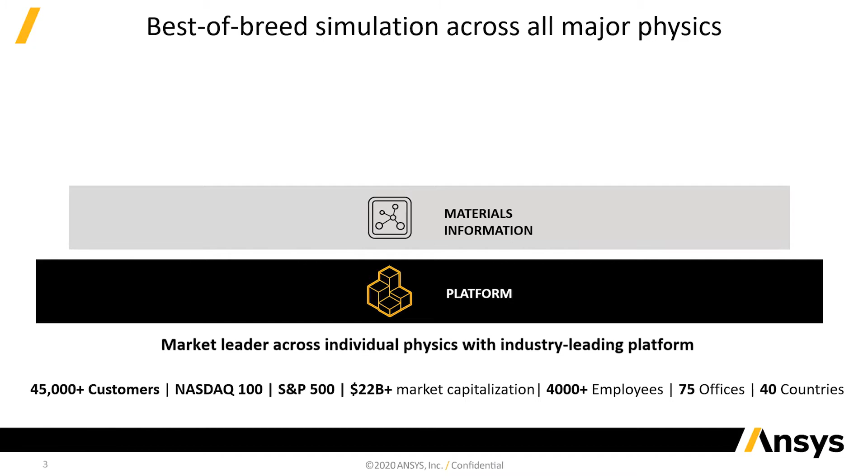We have what we call a platform solution, which is called Workbench. The new platform that we're developing is called Discovery. And on that, we have built a materials information platform, which allows us to conduct simulations in various physics, right? From fluids, doing CFD, structures where the additive manufacturing solution sits, electromagnetics, semiconductors, optical simulations as well.

For this year and in the next few years, the Ansys focus has been and will be on a couple of major pillars, if you will. One of them is autonomous. Second one is electrification. Third one is digital transformation. And that's where the additive manufacturing solutions play an important role.

We have world-class companies leveraging our platform. It's an interesting statistic: over 97 of the top 100 companies in the world use Ansys, all the way from aerospace to industrial companies, phones, and electronics manufacturers, especially in the 5G arena, who are using Ansys solutions a lot to understand the effects of 5G waves and wavelengths and how they can create products which can work really well with them.

Automotive, obviously, oil and gas, which of course is a debatable scenario right now, seeing where things are going. A lot of the home goods, consumer industries, and also a big chunk of the healthcare companies use Ansys platforms. So let's jump into the additive solutions. That's what we are here to discuss.

At Ansys, what we have created is a comprehensive and scalable solution to minimize the risk of your additive manufacturing process, right? With every additive manufacturing process, the reason we haven't seen the adoption that we wanted to see is that there's still a lot of risk. There's less repeatability in the process.

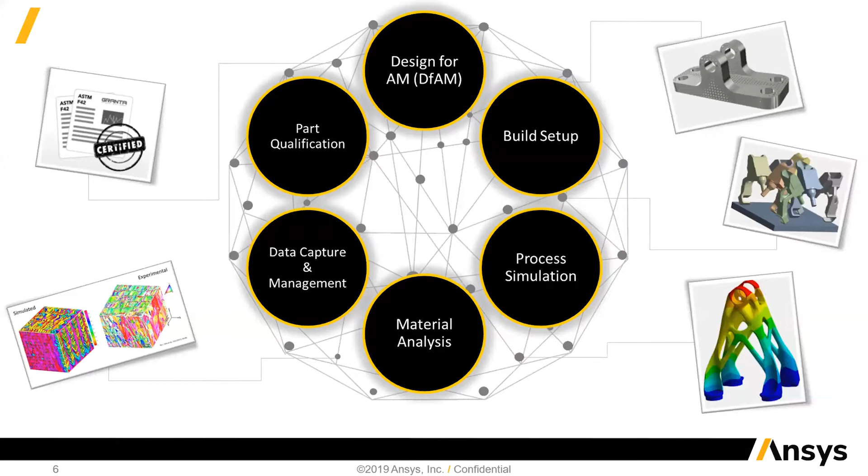So we started with process simulation, but quickly realized that our customers require more of an end-to-end solution to actually make sure that their additive manufacturing supply chain or process is successful, right? Starting with design for AM through build setup, of course process simulation, which is our bread and butter, material analysis, data capture, and all the way through part qualification. And I'll jump into the functionalities of all of these in a bit more detail.

So we are not a CAD company. Like I mentioned, we are a simulation company, but we do partner with a lot of CAD providers, right? From Autodesk to PTC, all of them are really close partners for Ansys. When we say CAD modeling, what we are referring to is more about creating files which are suitable for additive manufacturing, repairing the facets, doing topology optimization, lightweighting, latticing, and the like.

Moving into the build setup area, this was born, I would say, out of complete customer feedback. People had the design for AM tools from Ansys, and they had the process simulation tools, and they didn't want to jump into other tools just for creating the build files.

So we had this tool launched about 6 months back. This is limited to powder bed fusion only as of right now. The process simulation, again, limited to powder bed fusion and DED, so metal AM technologies. Right, as of right now, we are working actively on other technologies, other manufacturing technologies as well.

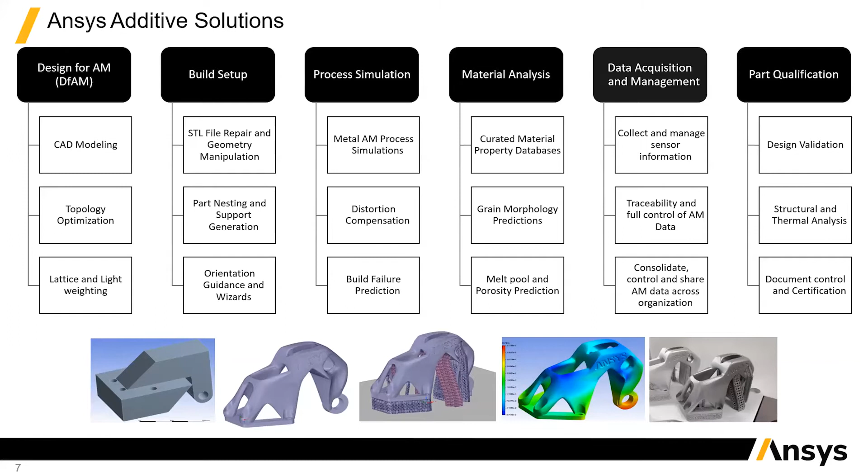Material analysis, that's our additive science tool, which went full release only in January of this year. It was in beta form earlier. And this is geared towards more advanced metal AM users where they can dive deeper into the microstructure levels. Data acquisition management and part qualification, those are basically coming from our Granta acquisition that we made earlier this year.

So just to give you a brief background on how fast we have been moving and the Ansys dedication, if you will, towards additive manufacturing. We acquired a company called 3D Sim early in 2018. And this was what our portfolio in additive looked like at FormNext of 2018.

And in just 1 year at FormNext 2019, the one where I met a lot of you people on the line over here, we expanded our portfolio to include all these different tools, right? Like I was saying, from design all the way through qualification. This has basically given our customers the entire tool set within one software environment, right?

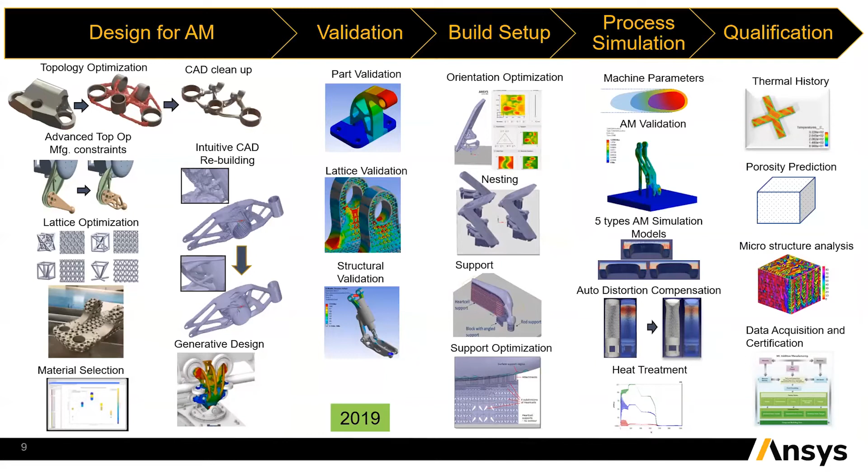So just diving a bit deeper, being cognizant of time, I'll not let the animations roll through. We have two different ways of design for AM or topology optimization inside of Ansys, again, through two different platforms, which I was mentioning earlier. One is through our Discovery platform, which is more of a GPU-driven,

graphical-based interface. The other one is through our Workbench platform, which is much more simulation-driven, where people who are more accustomed to the FEA world can create scripts and create the topologically optimized part. So we're not trying to discount any kind of users, and we want to cater to both the users.

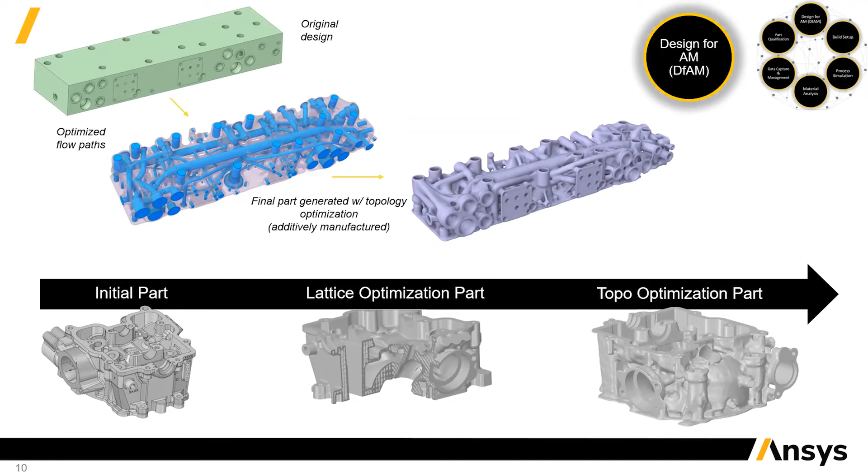The idea that we had over here is with the additive manufacturing world, it's much more of a younger crowd which is coming in. There's a lot of design engineers, which traditionally has not been the Ansys target customer, right? What we are trying to do over here is target even the designer level engineers who are trying to get into the additive manufacturing space.

For our build setup tool, as I was mentioning, this is for metal powder bed fusion. What I really like about this tool is it's very intuitive. As you can see, I don't know if you can see my cursor over here, but the heat maps really allow anyone to create the right build orientation. One of my first job experiences was from the service bureau, and I really know the pains of finding the right orientation. It takes a lot of trial and error, a lot of practice.

So what we have over here in the heat maps is you can either have the least amount of supports, you can prioritize your build speed, or you can have your distortion tendencies, and you can give your weightage accordingly. By default, obviously, it's set to the center and it automatically finds the right orientation, but you can drag depending on whether you are in a nick of time and you're trying to build a part in the fastest way, or if you want the least amount of supports and make it more cost effective.

In the latest release, we are also adding a heat map on the cost. Of course, that is, again, a little bit of a perspective thing. It helps if you're making a large number of similar parts versus a lot of different parts and things like that.

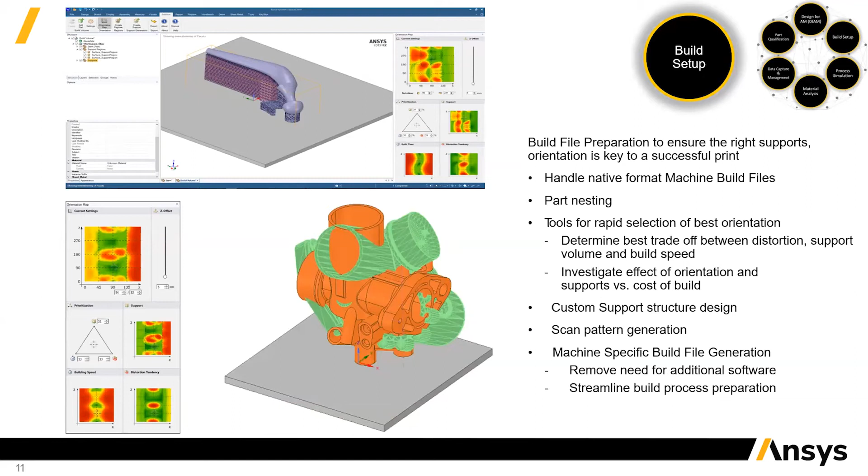Process simulation, this is where everything started. Basically, what we are trying to do with process simulation is predict any kinds of build failures and ensure your metal parts are coming out first time right.

We can predict blade crash, we can determine any stress and strain accumulations, how the part would behave when you remove it from the build plate, what kind of effects and distortion are there in your metal parts before and after cutoff from the build plate. So all of these essentially help you remove the guesswork out of your process and ensure that your parts are coming out first time right.

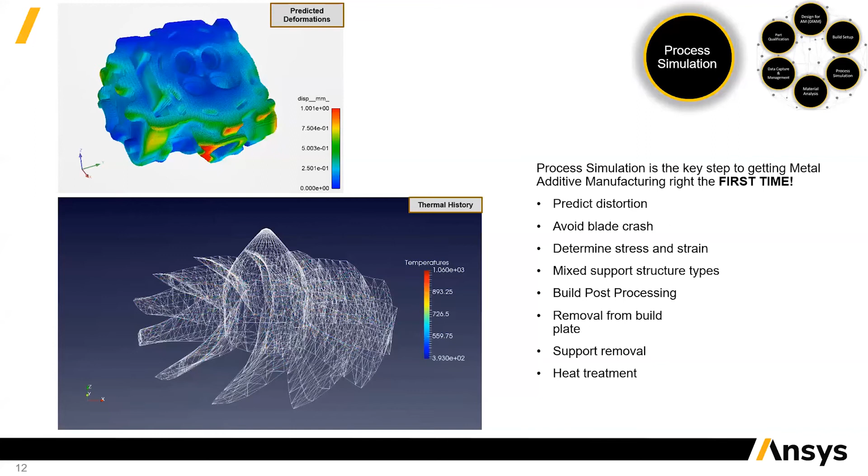Material analysis, again, a very new tool that we have going into the micro level capabilities, predicting the porosity, your microstructure, grain size, how it's oriented, how your melt pool looks. These are of real interest to metallurgists and AM specialists who are diving deeper and want to know how their parts will behave once they're out of the printer. And this also helps in the part qualification a lot.

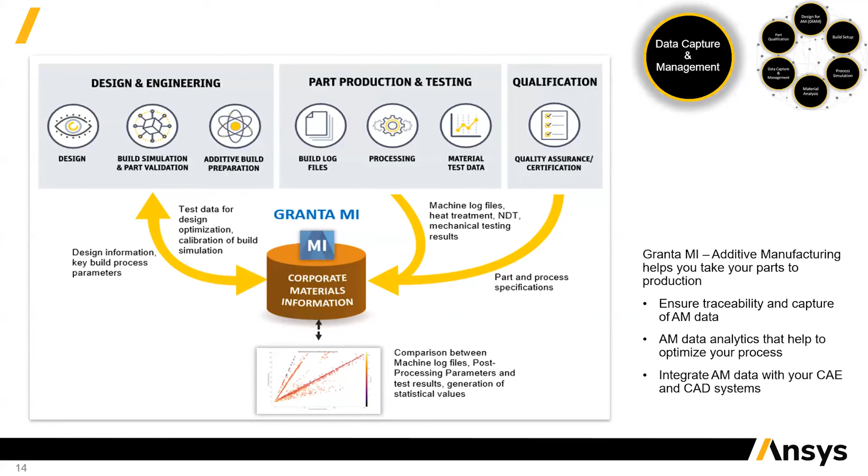Which brings me to our last point with our data capture management and part qualification with Granta, which has the databases for all around the world. They also have a tool called Granta MI, where all the information right from your design stage through build simulations, your material manufacturer, your OEM, your build log, everything gets accumulated and it automatically spits out a certification report for your aerospace standards, for your healthcare or medical standards and such. So essentially completing your chain of events, right?

And running about 4 minutes over here, just quickly sharing our roadmap, where we are headed. We have partnered with ExOne and we are creating a binder jetting simulation as well, especially on the sintering side. We are seeing a lot of interest from our customers over there. We continue to add a lot of partners. Renishaw, who just spoke earlier, Trumpf, Additive Industries, we are already partners with EOS and SLM. We need to work really close if we want to get accurate simulations and also ensure that these machine manufacturers and their customers are satisfied with the quality of prints, right?

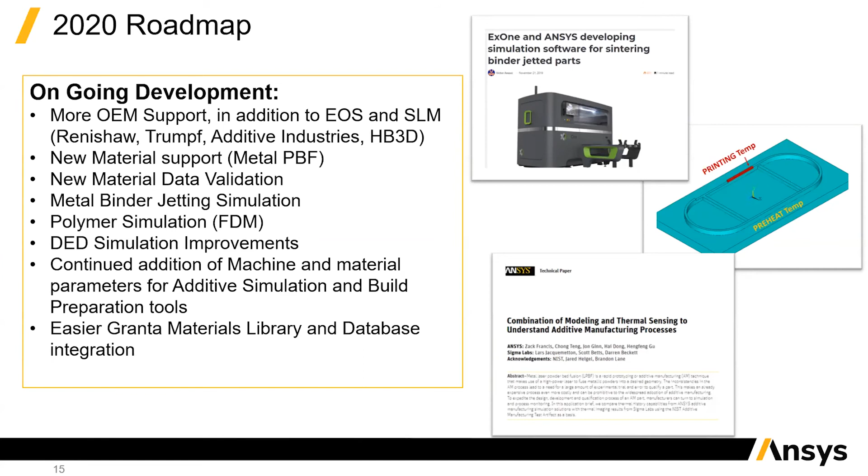We're also working closely on predicting FDM simulations and other polymer simulations, but that's still down the line for us. And how are we doing this? We're working with a lot of partners, including Dyndrite and a lot of others in Europe, in US, and in Asia. So thank you all if you guys are on the line. And with that, I would like to take any questions if there are.

All right, thank you, Nilay. That's some exciting news with ExOne you've got going. First question, could you speak more about the melt pool dynamics prediction capability from Ansys?

Of course, yeah. Are you still seeing my screen? Yes. Perfect. So what we're trying to do over here is we take a cubic millimeter of the area, and then we're diving deep into the microstructure over there, and then we're extrapolating these results for the entire part, right? We cannot do a microscale level simulation for the entire part. It's possible, but it would take us weeks and weeks to do it. So right now it's basically being predicted on a really small cross-section of the metal part. But what we are also doing over here is taking information from the metal OEMs directly from the material manufacturers and taking all these data and then outputting the results.

All right, thank you, Nilay. From Dylan, does Ansys have on the roadmap a closed loop dimensional optimization workflow designed for additive manufacturing to print, scan, calculate anisotropic predistortion, modified design data, or process input and repeat?

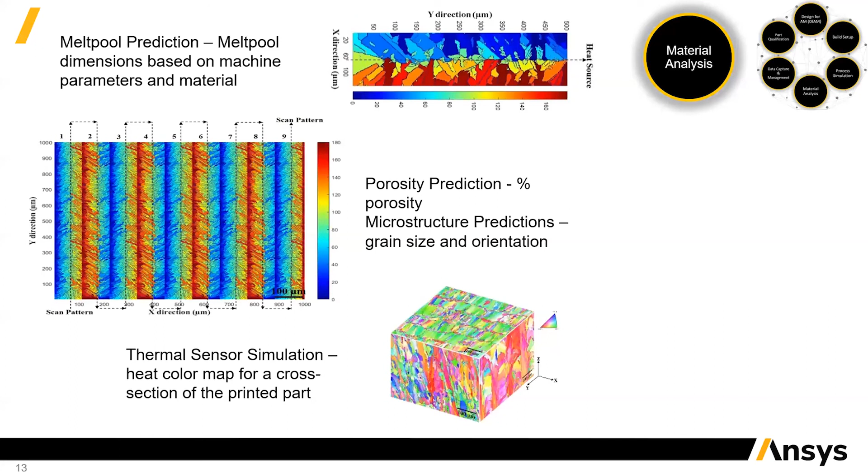So closed loop control would be the dream. That's where we are headed. And I think that's where a lot of the manufacturers, metals, plastics, composites, anyone would like for us to go. That as soon as you have any kinds of irregularities, you can automatically correct, and then you can send it to your print. And for that, we're working closely with a lot of manufacturers. That's in the future, and it's not as easy as it sounds, but we're working towards it.